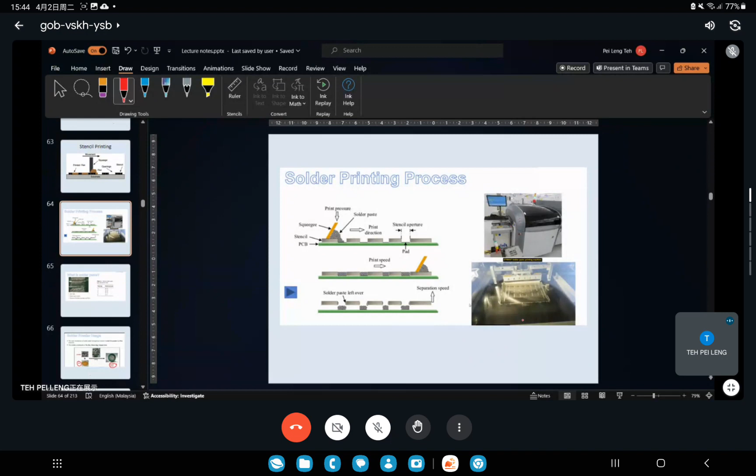This one is the stencil. Okay, they put the paste here. They have the squeegee print. So this is the one paste. So you have many sizes.

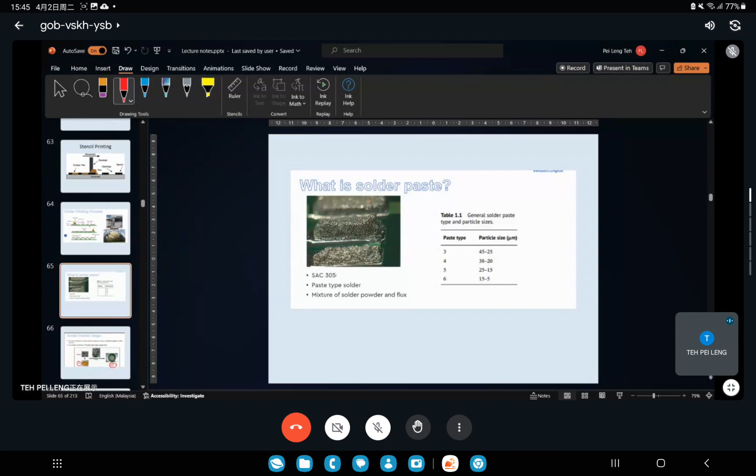Depending, so they label by number. The bigger the number is, the smaller the particle size of the solder powder. Okay, so it's a mixture of powder and flux, we call it solder paste.

Okay, so SMT processors normally use this one. So I promise to show you the oven, something like this, very long one. Okay, so the computer screen will show each zone's different temperature. This one is set by the engineer.

Okay, so basically the oven inside, you have many zones, right? So the unit will travel, will flow like this. The product will flow like this. Okay, it has a conveyor belt.

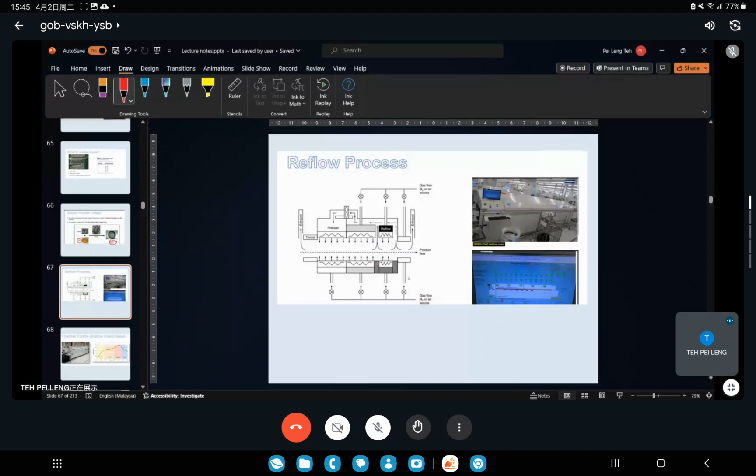So this is very long. So inside there actually you have many zones. Okay, so you start with ramp up and soak. Soak is for flux cleaning. After the flux cleans away the oxide, then only reflow.

Okay, only reflow melts the solder. Then when the unit is going to come out, then you need to do cooling. Just like you do thermoplastic, and you want to shape it, then you need to cool it. So solder is also the same.

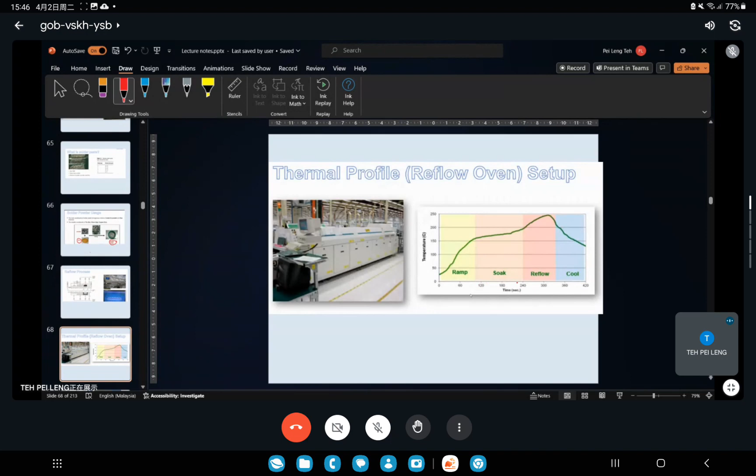So it will travel here, go in, close, travel in. There is a conveyor belt. Go, and here, so the belt is rotating like this. Okay, so the speed is controlled by the belt. So how long, from here to here, how long? So this is the one.

Okay, we continue on. So basically, in the flip chip, we have silicone sealant. This one is polymer. Silicone sealant, okay, this is silicone thermal interface material. The function is to let the heat dissipate.

What is this, the brown color thing? This one is called heat sink. Okay, heat sink. So this is underfill. So this is flip chip. Flip chip, this is underfill.

Underfill is epoxy. Okay, so you have a die, solder bump. So you have a substrate. Okay, substrate's core layer is epoxy. Okay, then the surface they use epoxy solder resist.

The core layer is epoxy, but sometimes they use this one. This is the one type of epoxy. Okay, they have a core so that it will become harder, very strong.

So surface solder resist - why call it solder resist? Resist to solder. So the solder won't form joint out from the bonding pads. Okay, so it will just form the bonding here on the bonding pads only. It will not form joint on the green color one. This is what we call solder resist, like this. It only sits inside this pocket, the bonding pads.

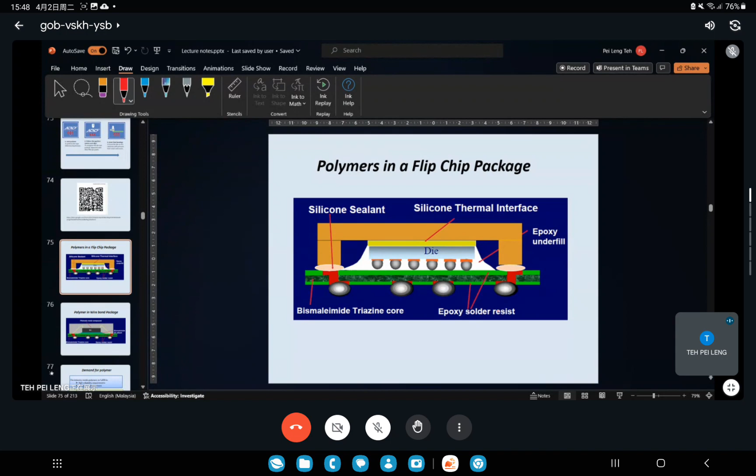It will not form joint over here because epoxy and metal, one organic and one inorganic, cannot bond. Adhesion is very bad. So that's why they call it solder resist. Okay, if wire bond - remember, wire bond has no bumps. Okay, we just use adhesive.

Okay, this one is polymer. Then this is wire die. Okay, the substrate the same, you have a solder resist layer, you have the core layer. Okay, then in between you have many multiple copper traces.

Then because you are using wire, okay, you need to protect the wire and also the die. Then we use encapsulate, also known as mold compound. This one normally is phenolic mold compound, using phenolic.

Phenolic is thermoset or thermoplastic? Phenolic is thermoset or thermoplastic? Murray? Thermoset. Thermoset.

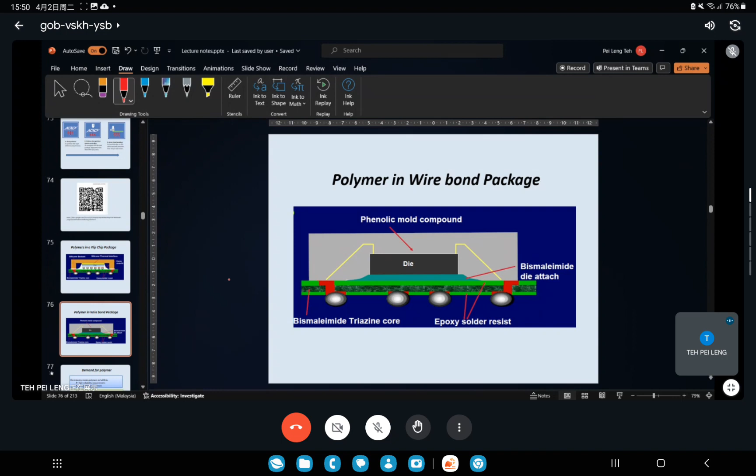Demand for polymer used in this industry: we must fulfill the high reliability requirement. High reliability means it must be able to function well in a demanding environment. You are dealing with many kinds of environment, such as temperature going up, moisture, chemical, and all that. So the requirement must be high.

Dimensional stability means the dimension must be stable. That's why we use thermoset. We don't use thermoplastic because thermoplastic cannot stand very high heat.

But for transporting the unit, one can use thermoplastic, like the tray. Okay, so excellent thermo-oxidative resistance is needed because we deal with oxygen.

You must be oxidative resistant, especially since polymer is very sensitive to oxygen. And good chemical resistance, because we deal with many chemicals. Low moisture absorption too, because you heat up and cool down, so moisture might be captured inside. So your polymer must have low moisture absorption. Of course, high mechanical strength plus high stiffness, and high compressive strength.

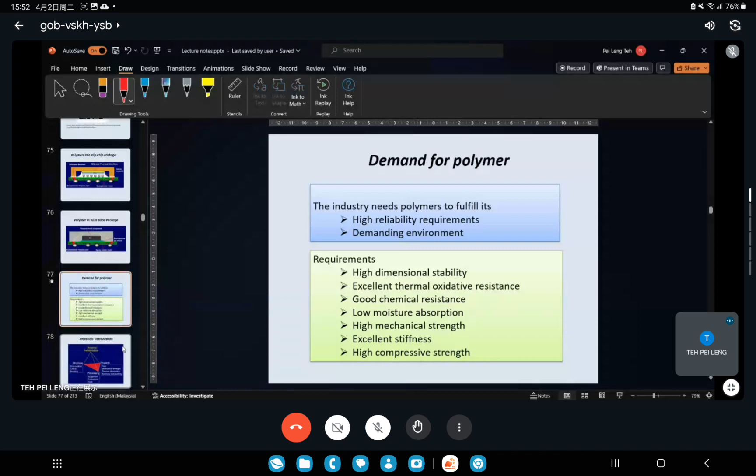This is all the demand. Our target is to have very good performance and good reliability. In order to achieve this, it actually depends on three things: structure, processing, and property.

Secondly, processing: the equipment must be stable, and shouldn't always have downtime, so that you get high productivity and high yield.

Properties - as you know, the molding compound when uncured is in liquid form, right? So anything in liquid relates to flow behavior, your rheology. That's why you need to learn about rheology. Like thermoplastic, when it's melting, is also liquid, so rheology is also important. Flow behavior is important.

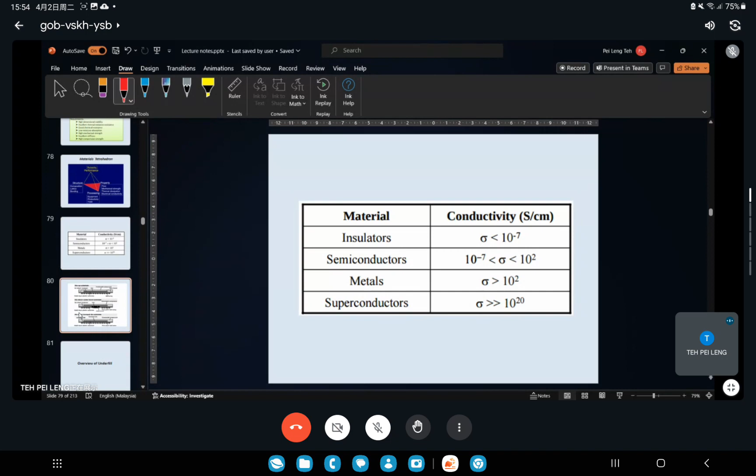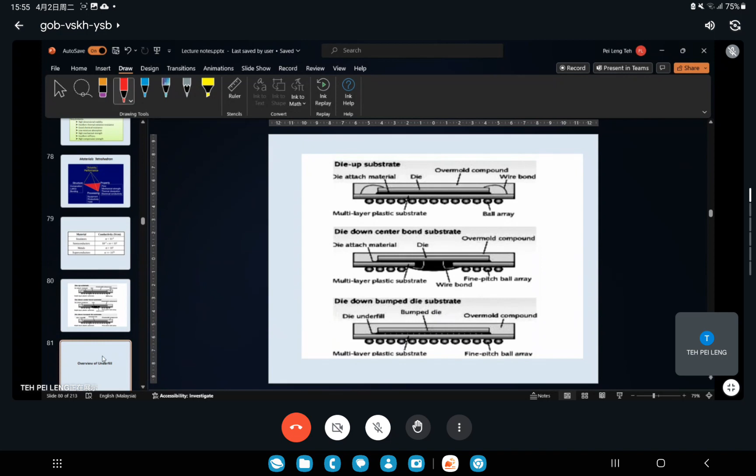that's normally wire bond - definitely no solder bumps. When you see underfill and solder bump, it's flip chip. Okay, the next topic we're going to learn is underfill.

We are going to learn underfill. So what is underfill? Where is underfill located? Here, okay.

In wire bond chip technology, we will not have underfill. Wire bond will not use underfill. If it's wire bond and I see the word underfill, it means you lost it or didn't come to class. The concept is wrong, then everything will be wrong. You need to be careful, yeah.

In flip chip technology, there's a gap between the substrate and the chip, the die and the substrate. Why is there a gap? Because we have solder bumps. The gap height will be the solder bump height.

So underfill is a highly filled epoxy system. It's a composite with filler. This is underfill because it underfills underneath, between the die and the substrate, and goes through all the bumps. So it's called underfill.

The fatigue will happen - happen to what, to where? To these solder bumps, because of the mismatch between the die and the substrate.

Disconnect. Connect. Okay, no current flow. No signal flow. Okay, so it's correct. Very good, so no current flow.

So disconnect. So what's the purpose of putting these solder bumps? To give interconnection. Okay, okay.

So this is a picture, a very simple picture. You must understand the picture well so that you can explain. I put a big picture and less explanation, meaning if you understand the picture, you can write many things. Normally you don't like to see many words, right? So I only put one picture. So this picture you must understand.

After my explanation, if you don't understand, let me know. Okay, so this is the mechanism, the underfill encapsulation, for solder joint protection. You give protection to this solder joint. Where's the solder joint? This one. What is this? This is die. This is solder bumps.

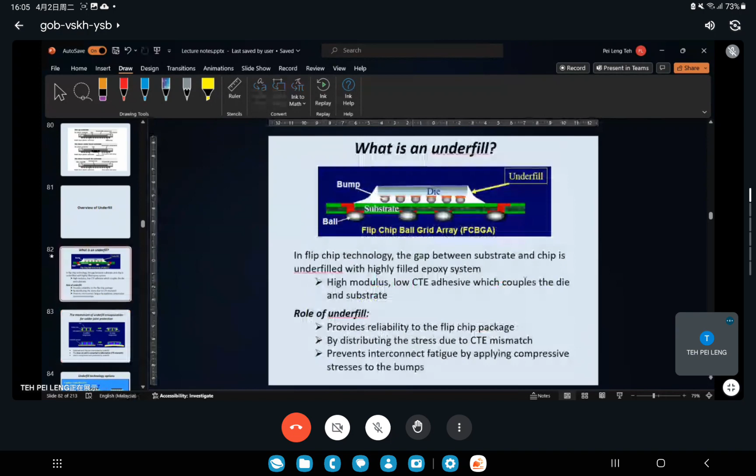So you will have fatigue on solder joint. Not written here, right?

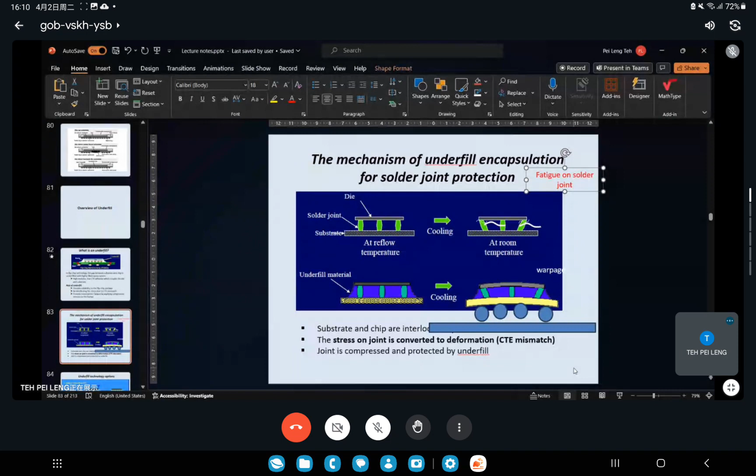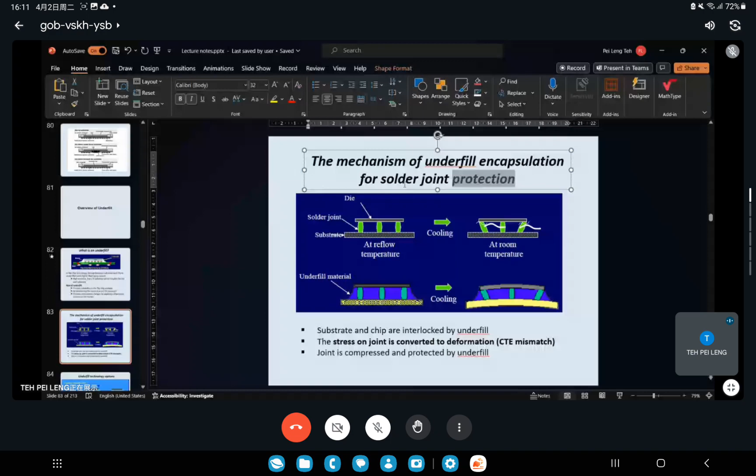Faham. So this is how underfill - no, not contribute - this is how underfill prevents or protects against solder joint fatigue. This is how underfill provides protection to the solder joint. Can follow, okay.

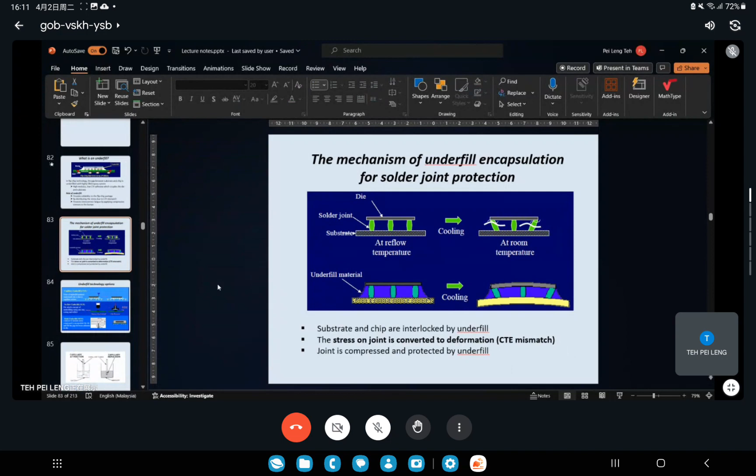Can I move on? Ya, Doktor. Okay, so this is just to show you how they dispense underfill on this package.

One way is capillary underfill. For capillary underfill, the underfill is inside here. They will just dispense at one side, then due to the capillary action, the underfill can fill in. Of course, you must apply some temperature so that the epoxy flows.

I want to ask you, this epoxy is thermoset, right? So thermoset, when we apply temperature, what will happen to the viscosity? Will it become higher or lower?

Son. Son juga puasa ke? Tak ada. Biasa Son ada kan? Ya, doktor.

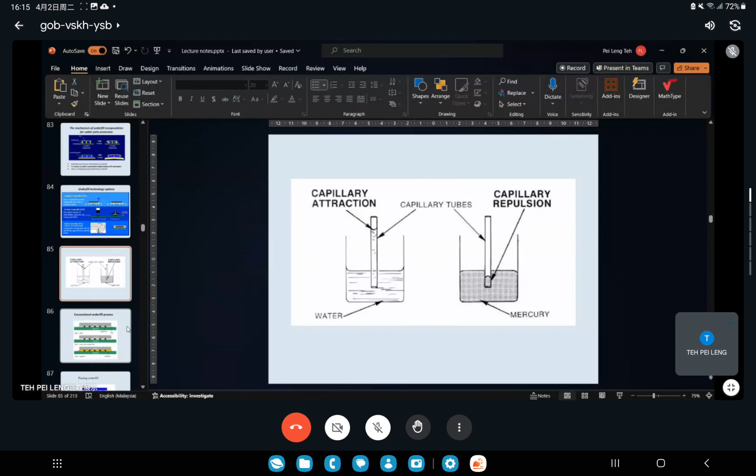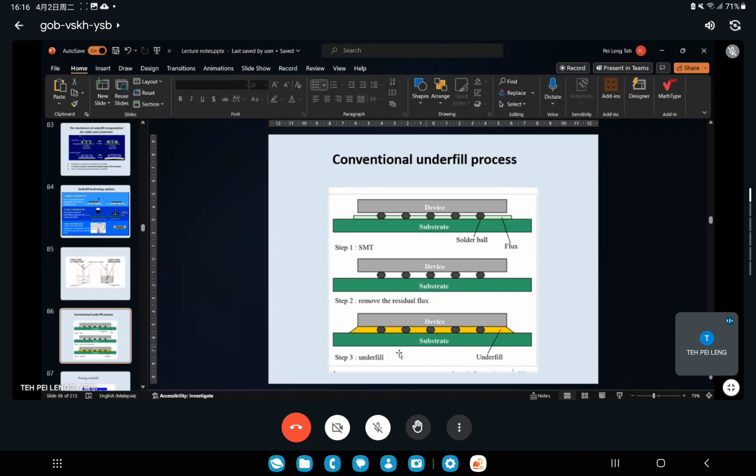Then only they put the underfill, or else if you have an oxide layer, you will not have good bonding between this underfill and the solder bump. This is one of the examples.

So this is - then only go for reflow, meaning curing. So this is another method. Hybrid underfill - there's another method currently in research.

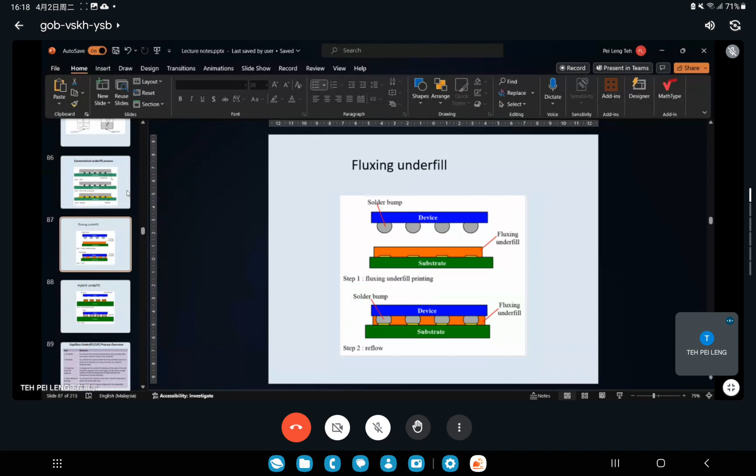This one is not going to come out in your exam or test, just showing you the current technology. They can have ideas something like this - macam-macam boleh mereka buat. Okay, come to this one.

Why doesn't this one use preheat? Because they want to differentiate it from this one, otherwise people might confuse them. So they put this one as 'prebake'. Prebake is what?

Prebake is like your calcium carbonate or silica, which tends to absorb moisture. So before you compound, you need to put it in the oven to remove the moisture. Same thing for the package, because it's polymer, it tends to absorb moisture, so moisture gets trapped inside the package. Before you do the process, you must put it in the oven to let the moisture evaporate.

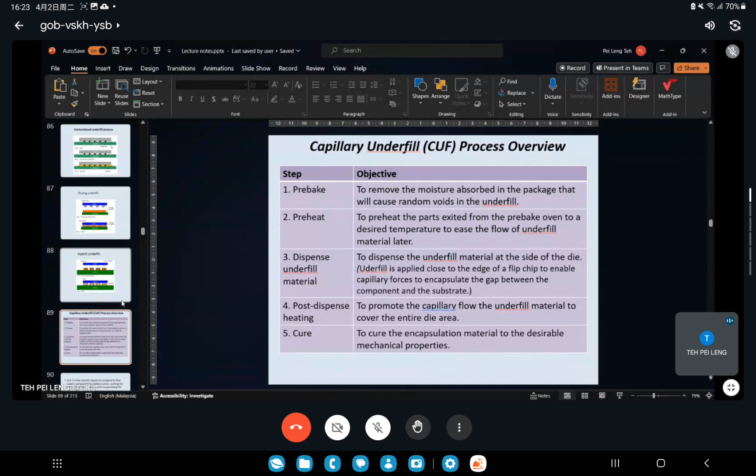After covering it, you must cure it to achieve the desired mechanical properties. Up to here, can anyone not follow? Actually it's just common sense - every step has its own objective, its own purpose.

Capillary underfill is a low viscosity liquid designed to flow under the component by capillary action. It must be able to wet the chip and the substrate surface so they can form bonding and protect your solder joint. Underfill is more sensitive to moisture because it's polymer, so it can form voids - that's why during processing you need to preheat.

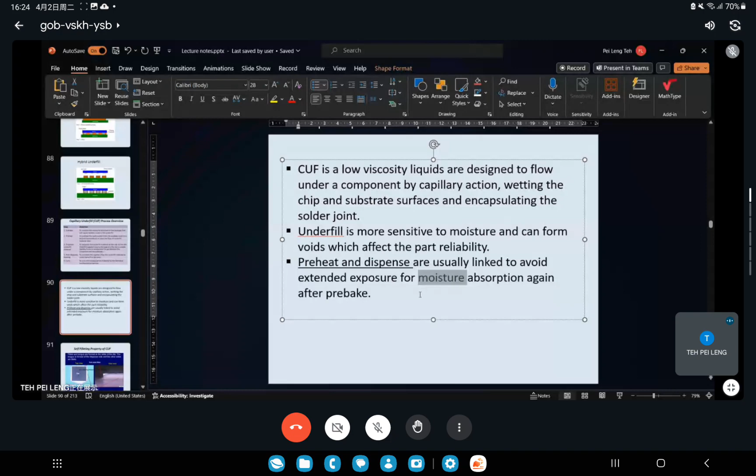You need to preheat, then after that dispense. Preheating and dispensing are normally done together to avoid extended exposure to moisture, avoiding moisture being absorbed inside your package, which would cause voids. Normally they will dispense here.

Every process will have one tongue. What is this tongue? It's where you dispense your underfill - if you dispense here, there will be a shape like a tongue, side view and top view. So it must have a fillet, otherwise it's incomplete.

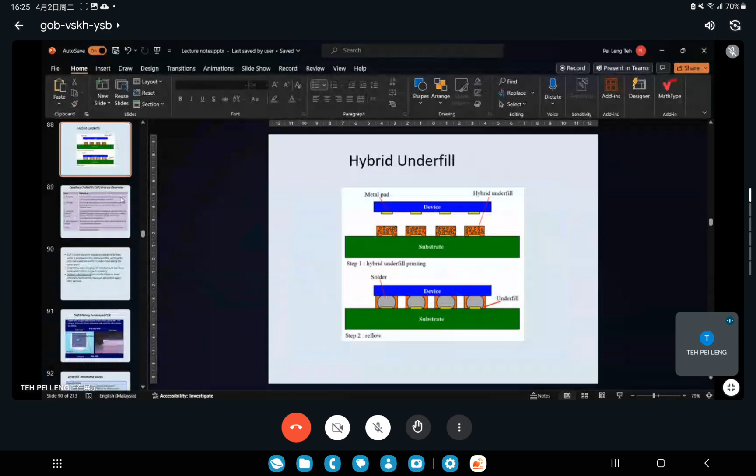So, processing issues - when we do the underfill process, first you must optimize your dispense weight and pattern. What is this? How much underfill do you want to dispense each time? It must be consistent - you cannot have more one time, less another time, then medium, because then the fillet width will be different. Some will have incomplete fill, some will have excess flowing too far. So how to control this? Normally they control the weight.

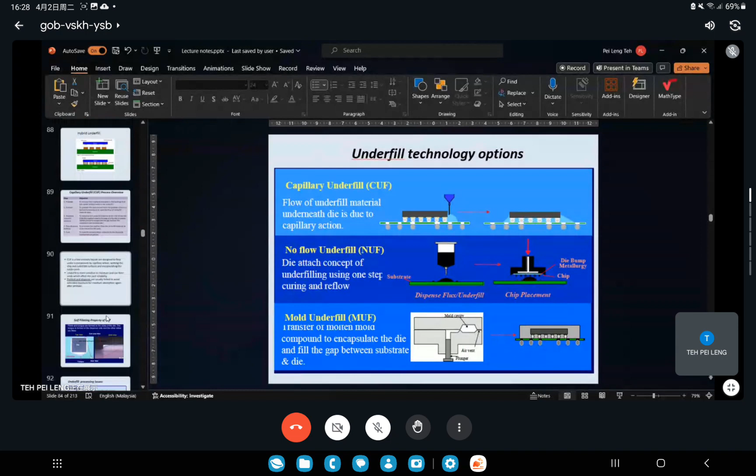If your epoxy hasn't gone through the process yet but already cures inside your syringe, that will be a loss. Your boss will question you - what happened? So you need to be careful, that's why you need knowledge about polymer. Otherwise you might be asked why you can't apply temperature - because curing will make it hardened. If not, people might ask why something exposed to temperature becomes hard - is it magic? As a polymer engineer you must be able to explain this.

So expect, especially with the syringe, don't let it drip on the unit. You want to dispense here, but make sure your robot doesn't go and dispense there instead. Or if your underfill material's viscosity is too low, when the robot travels over it drips on your die - that causes defects, rejects. So underfill on the die, or incomplete filleting, very little, not enough - only filling up to here.

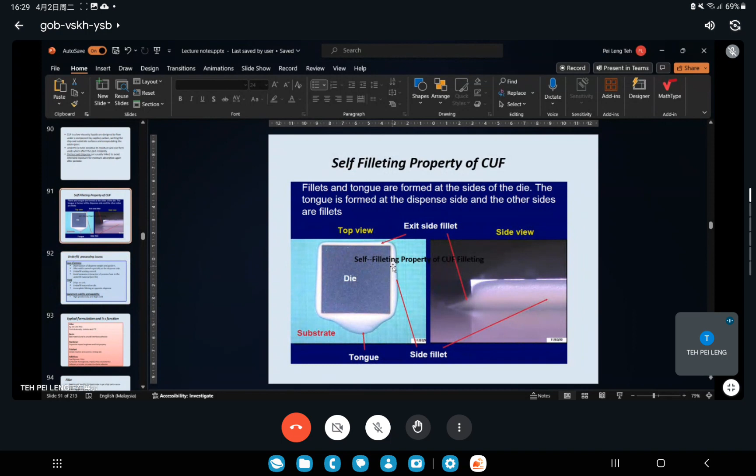Incomplete. So your equipment must be stable and capable so that you can produce high productivity and high yield. Every day your job is to make sure of high productivity and high yield, and make sure you hit your yield percentage. That is your job if you want to work as a process engineer.

I think I will stop here. I'll continue on Thursday. So any question before I end? No, so far so good.